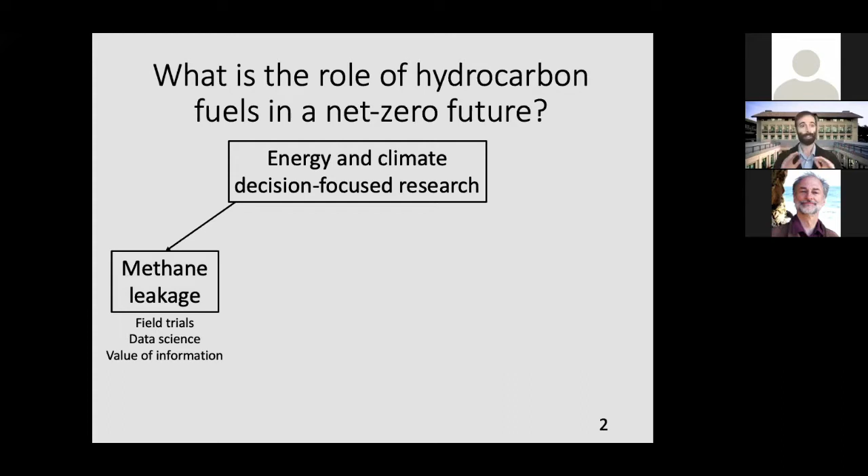So a bit more broadly about who I am as a researcher. My research focuses on the role of hydrocarbon fuels in a net zero emission future. So this is, broadly speaking, energy and climate decision focused research, and sort of four major areas, one of which I'll talk about in detail today. I'll give some tastes of the others. Methane leakage, methane emissions from the natural gas value chain is a major area I'm working on right now, particularly remote sensing, airplane and satellite-based methods for finding methane emissions. I'll talk a bit about that at the end. Energy systems modeling, which is what I'll be talking about today. Machine learning and energy consumption behavior analysis.

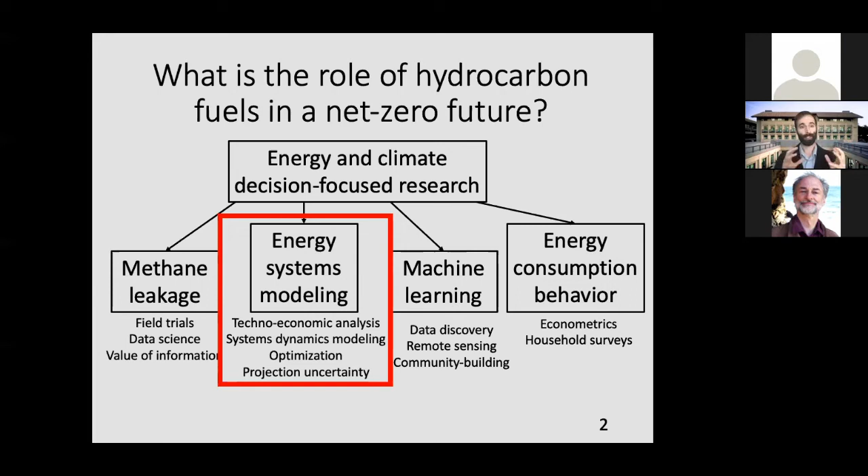So today I'll be focusing again on energy systems modeling, particularly what's called techno-economic analysis, trying to figure out how much something that we can't build yet, or haven't built yet, is likely to cost, and systems dynamics modeling and optimization, so modeling a system in motion.

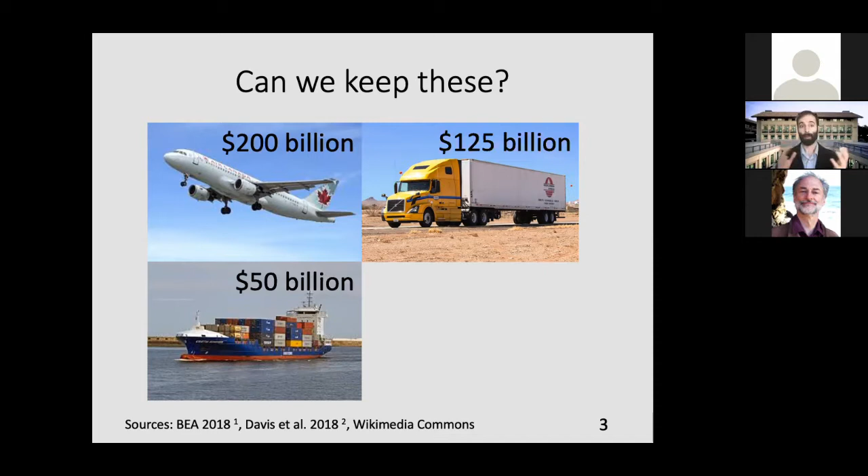And the big motivating question behind this research is, can we keep our $200 billion worth of airplanes or $125 billion worth of heavy trucks or $50 billion worth of ocean ships, and this is just those registered in the United States, a significant amount of capital that we have. It would be great if we could keep using it in a net zero emission future, especially given that globally, this represents about 6% of fossil fuel and industry-related carbon dioxide emissions.

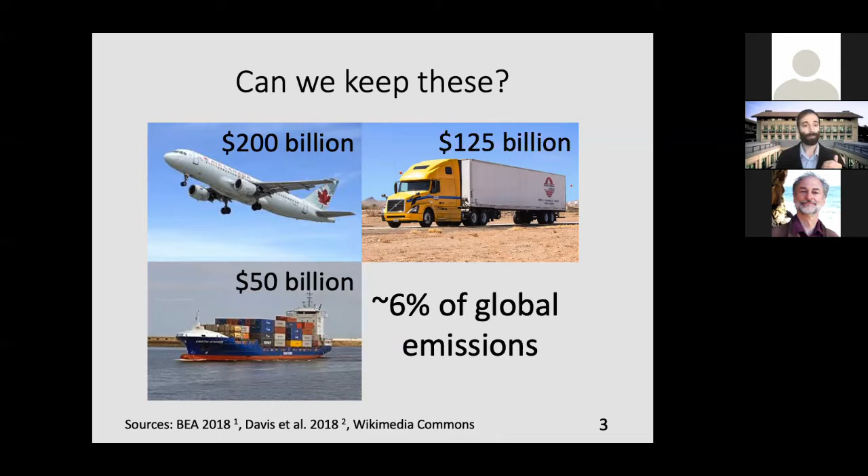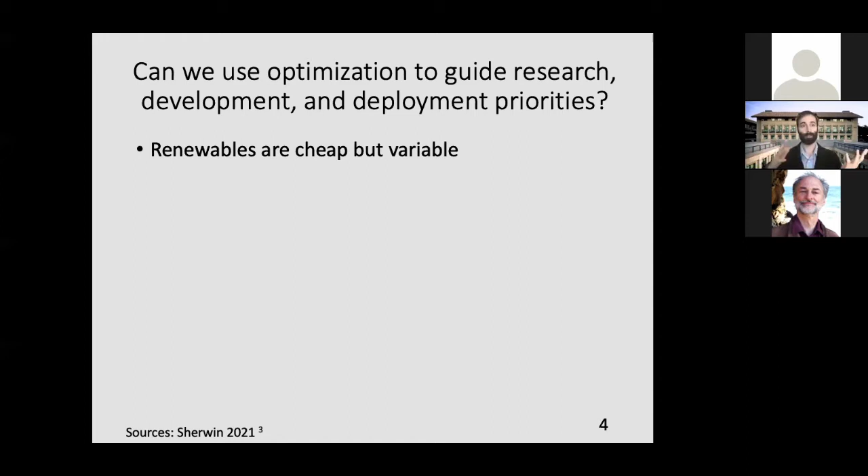So in addition to this broad question, I've also got a sort of more researchy question of, can we use, or how can we use, optimization to guide research, development and deployment priorities for emerging technologies? And a bit more detail on this: renewable electricity is getting super cheap, but it's variable. The sun is available some of the time, same with the wind. And that's going to make it difficult to use renewable electricity to power capital-intensive processes where you have to build a bunch of stuff that's expensive to build, and you kind of want to use it a lot of the time if you can.

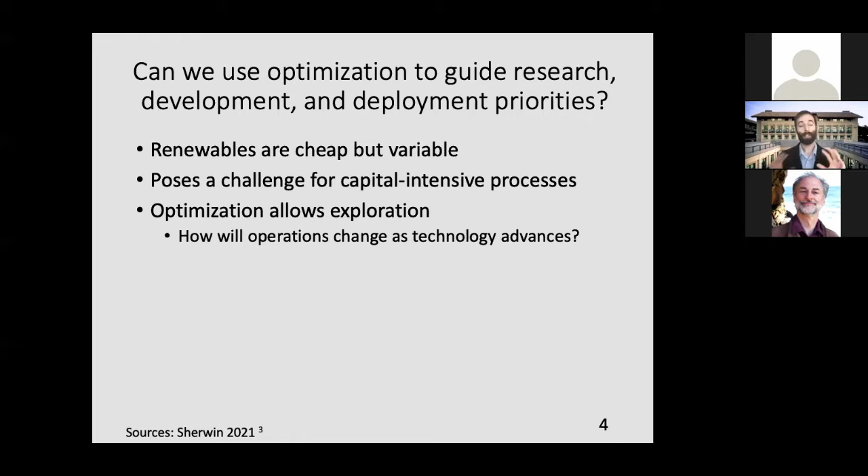And optimization lets us explore these trade-offs of designing and operating large or capital-intensive systems that are designed to use renewable electricity as efficiently as possible to produce chemicals or something else along those lines, and really understand how the dynamics of that system change as the technology advances.

And this helps us identify what might be non-obvious priorities for research, development, and deployment. Where do we invest in a given component? Do we want to make this component a little cheaper or more efficient or able to turn on and off faster? These are things that we can evaluate using this type of model and guide where we put our money to improve a given suite of technologies.

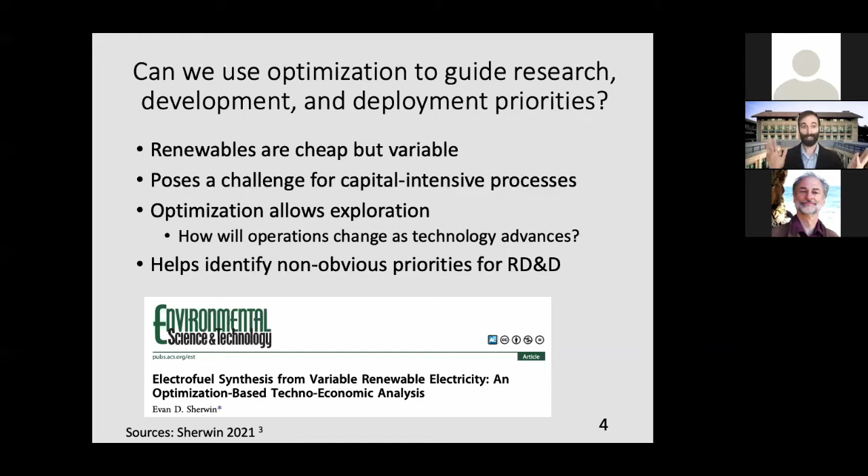So there's a real push, as Max alluded to, in the attempts to decarbonize the energy system, to electrify pretty much everything we can. It makes a lot of sense. Renewable electricity is super cheap, and it's basically zero carbon. So if we can just build a lot of renewable electricity and make everything run on electricity, then we've kind of solved the problem. And some of the economic motivations for this: natural gas electricity is somewhere in the ballpark of $50 per megawatt hour of electricity produced.

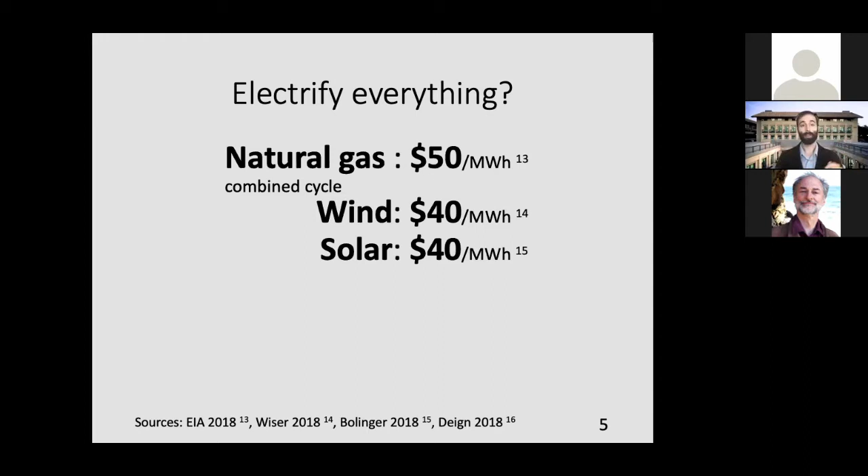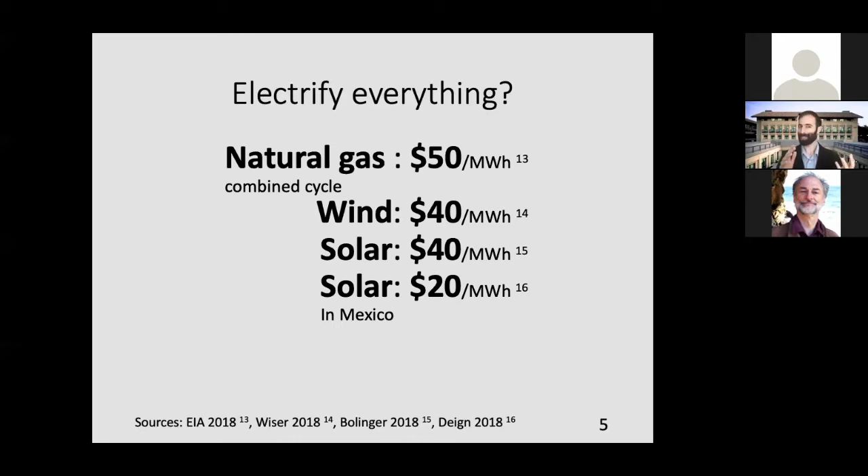And wind and solar at the best locations, at least as of a couple of years ago, about $40 a megawatt hour. So in terms of bulk energy, if it's okay that the energy comes at whatever time it comes, wind and solar in the best locations are already the cheapest form of electricity that there is. And in some places, it's way cheaper. In Mexico, even a few years ago, we were seeing power purchasing agreements coming in around $20 a megawatt hour. So that's half these United States numbers. And we're hearing numbers closing in on $10 a megawatt hour in places like Saudi Arabia. And even if that's underbidding somewhat, that's still an indication that these costs are really coming down.

So wouldn't it be great if we could run airplanes on electricity? Batteries are not there, probably never going to get there for long distance flights, but with electrofuels, with carbon neutral hydrocarbons, we can do that. And how can we do that? I'm going to start with the cartoon and then go into a little more detail in a minute.

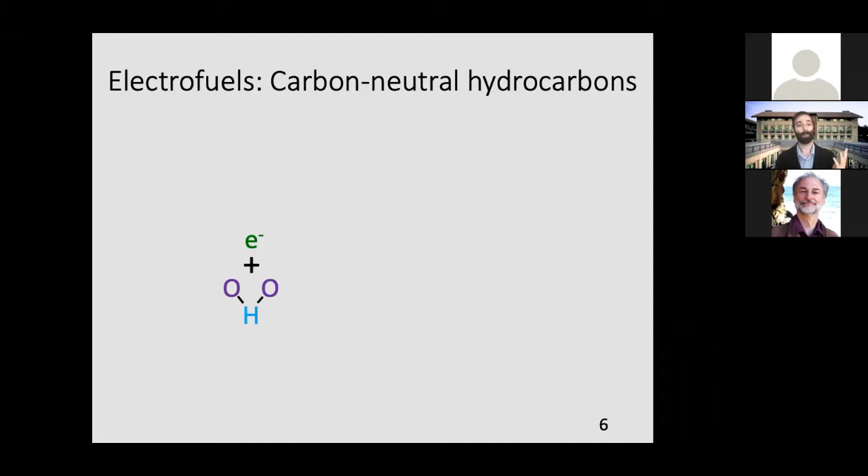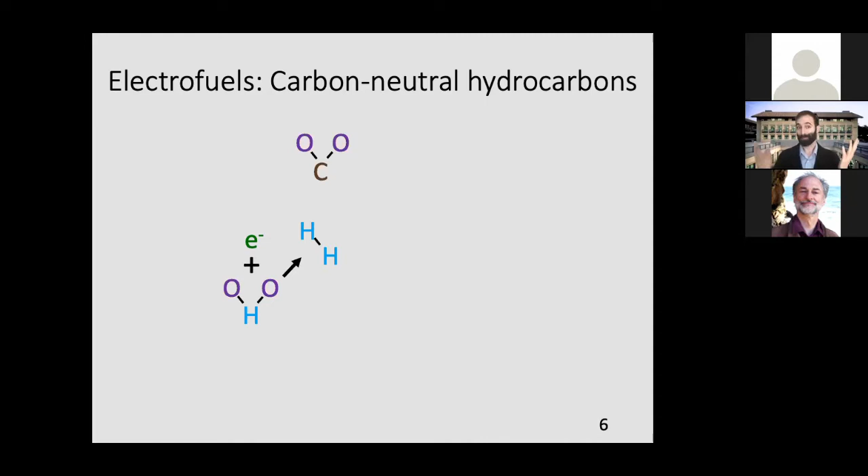Electrofuels start with electricity, and you mix that electricity together with water and do electrolysis of water, which splits it into hydrogen and oxygen, which I didn't picture here. Then you take that hydrogen and you mix it together with carbon dioxide that you've somehow taken out of the atmosphere. I'll get to how one might do that in a minute. Well, then you've got carbon, you've got hydrogen, so you can make hydrocarbons.

That's the basic idea. Of course, there are a lot of steps in between there, but with a hydrocarbon like this, once you burn it, yes, it emits carbon dioxide, but that carbon dioxide is just going back into the atmosphere where it came from in the first place. So assuming the process of making electrofuels doesn't emit emissions, it's net zero.

In this analysis, I'm focusing on jet fuel. And the main reason for that is, one, aviation is a super difficult application to decarbonize other ways. There's talk about hydrogen airplanes, or for short haul flights, electrification could work, but given how long it takes to approve new airplane designs and the state of the technology at present, we're probably not going to see hydrogen airplanes coming online in a big way for a couple decades at soonest.

So if we want to keep using airplanes and want to get to net zero emissions, we basically need a net zero emission liquid fuel. And the good news is that electrofuels are already approved for commercial blending, up to 50% into commercial flights. And that number could go higher if we add some additives. So this is something we could do today. This is not a far-fetched technology.

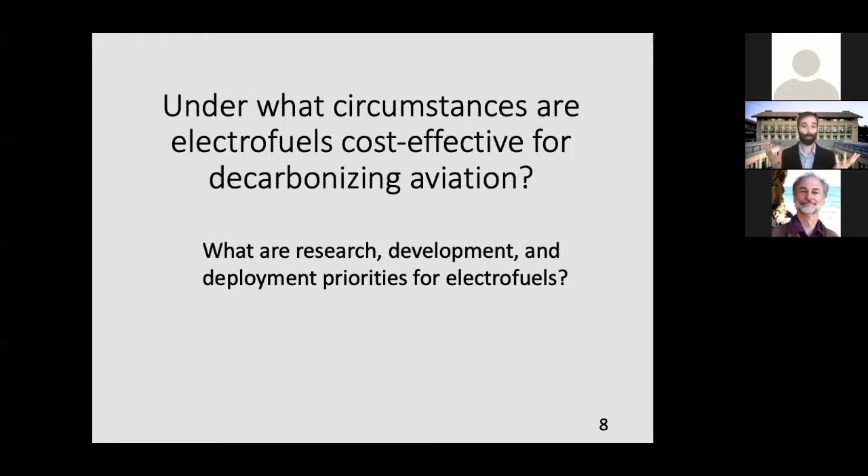So the more precise question that this talk's focusing on is, under what circumstances are electrofuels cost effective for decarbonizing aviation? Under what circumstances is this something we would want to do? And secondary question is, what should our research, development, and deployment priorities be if we want to get there?

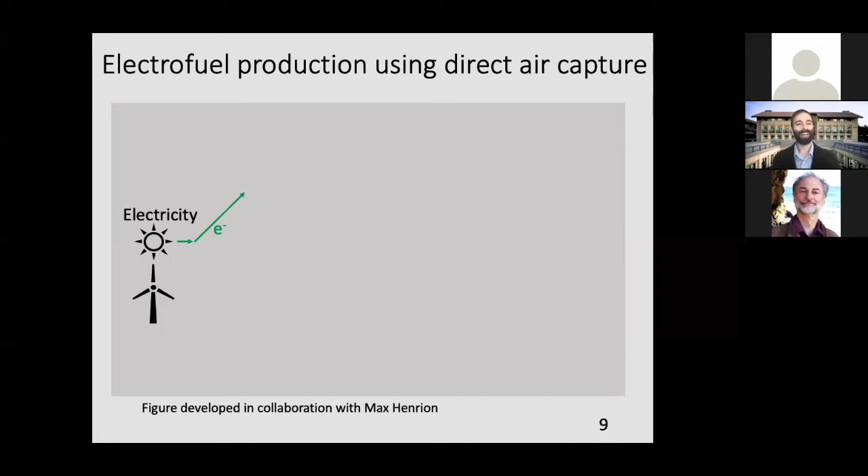All right, so getting into a bit more detail, the system that I'm looking at here is producing electrofuels using direct air capture as the carbon dioxide source. So I'll walk through the process. You start with electricity from the sun, from the wind, and I should note that Max helped design this figure. And that electricity is used for a few things, one of which is to power a direct air carbon dioxide capture system. And direct air capture, there are a few different designs, but fundamentally they're all basically a big cooling tower on its side, usually, that is blowing a bunch of air across some large amount of surface area, usually with a fan or something like that.

And on that surface area, there is what's called a sorbent. And that sorbent, it's some kind of chemical, binds to carbon dioxide in the air. And then that sorbent is regenerated by, you basically throw a bunch of heat at the sorbent, and it releases the carbon dioxide and regenerates the chemical, which you can then recycle. And so you get this pure stream of carbon dioxide coming out on one end. And by putting in a bunch of energy, you are able to continue the process.

And the heat requirements here, so there are two basic types of direct air capture, at least two basic types that are commercially available or under advanced stages of development. There is a relatively low temperature system, such as that produced by a company called Climeworks. That requires about 100 degrees Celsius heat, so about boiling, in order to regenerate the sorbent it uses.

And then there's a higher temperature system, such as that produced by Carbon Engineering, which requires heat at about 900 degrees Celsius, so significantly hotter. That also requires a bigger facility, but there could be some real advantages to that approach as well. For the heat source, if we want to run this all on electricity, one heat source could be an electric kiln.

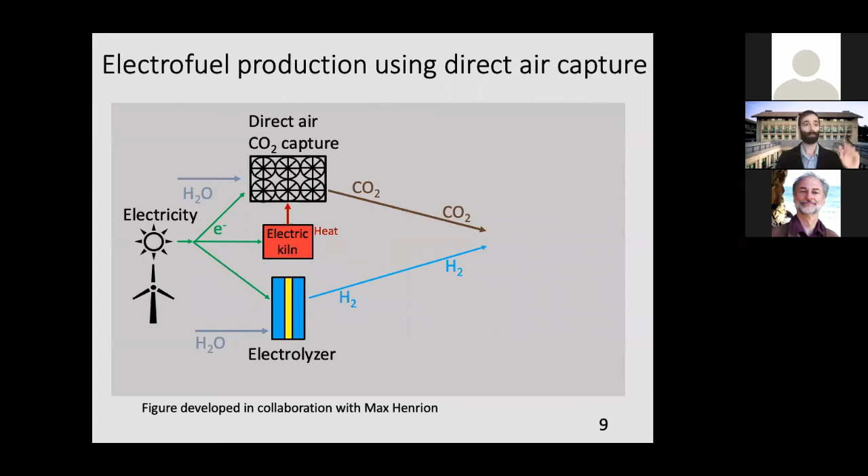So then we've got our electrolyzer, also powered by electricity. And that's going to take in some water as well and produce hydrogen and oxygen, which I didn't include on the graph, but is important for other parts of the system that I won't get into today. And then you run it through a fuel synthesis system. And the fuel synthesis, I'm assuming, is what's called the Fischer-Tropsch process, preceded by what's called the reverse water gas shift process. So reverse water gas shift takes carbon dioxide and hydrogen, mixes them together, and produces carbon monoxide and hydrogen. Once you've got carbon monoxide and hydrogen, you can then run that through.

So this Fischer-Tropsch process was developed in, I think, the 20s to take a gasified anything. It could be gasified coal or biomass and turn it into liquid fuel. So you can get your carbon monoxide and hydrogen from anywhere. Once you've got that, you can make liquid fuel with basically the same rough product distribution as refining oil. So potentially as high as I've seen up to 60% jet fuel, and then some diesel, potentially some gasoline or precursors to gasoline, which are not that difficult to upgrade. So we could get a decent amount of jet fuel out of this approach, and there would of course be markets for the other products as well, which would also be net zero emissions.

So the result's hydrocarbon fuel. And to give a sense of the energy requirements here, if we want to produce a barrel of oil equivalent of electrofuel, that's about 1,600 kilowatt hours. The direct air capture would require about 600 to 1,100 kilowatt hours of heat, somewhere between 35 and 340 kilowatt hours of electricity. And the high temperature system would take about 2.3 tons of water. The low temperature system actually produces half a ton.

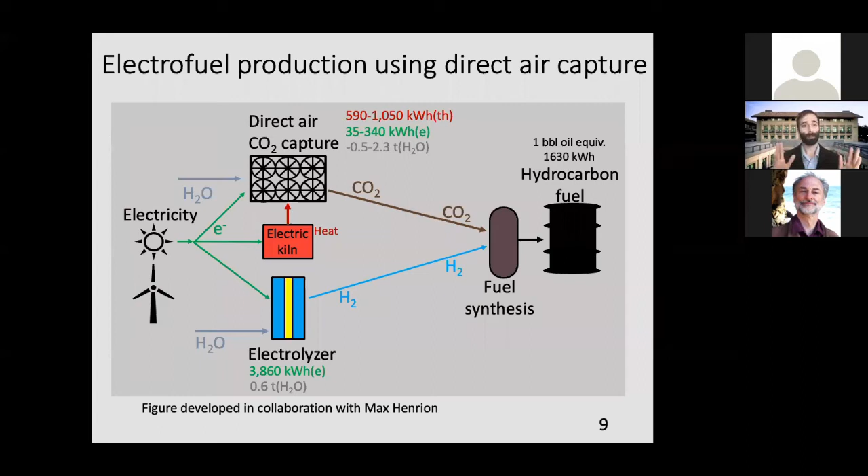But for those watching, many probably can see here, well, wait a second, this is using some pretty capital intensive equipment. We've got to build this whole big direct air capture system, the fuel synthesis, to a lesser extent, the electrolyzer. We probably want to operate these pieces of equipment more often than just when the sun's shining, when the wind is blowing.

So it'd be nice to have storage of electricity, lithium-ion batteries, heat storage, which could be molten salts or supercritical carbon dioxide, or even phase change materials, which can get essentially to the heat requirements for high temperature direct air capture, and hydrogen storage, either a big tank or if you're close to a salt cavern, something like that. Carbon dioxide storage, pressurized in a tank. You might even want to build a fuel storage system, just a big tank like a gas tank, and build a smaller pipeline, something like that. So those are some forms of flexibility that the system can use to help run, say, the direct air capture more of the time than the sun is available, or the wind.

But wait a second, if we're already in a world where we're pulling carbon dioxide out of the air, then there's really no reason we can't supplement this system with a natural gas interconnection and offset the resulting carbon dioxide emissions from the natural gas by paying somebody else at a different facility to capture the equivalent amount of carbon dioxide out of the air and put it in the ground, sequester it. So it's still net zero as long as that takes place. And this could provide some really important flexibility to the system that reduces overall costs while remaining net zero. And the same is true for grid electricity, which for a while is going to have some emissions associated with it.

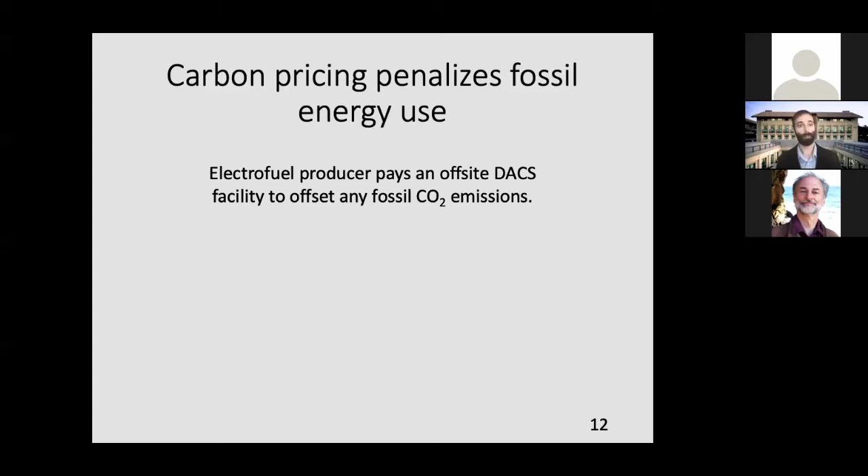And I should note that the natural gas I'm assuming is oxygen fired in the direct air capture system. So it's actually co-captured with the rest of the waste stream and then can be put into the electrofuel. And since it's offset by direct air capture at another facility, again, still net zero. And the cost of offsite direct air capture is just commensurate with whatever the scenario assumes the cost of direct air capture is.

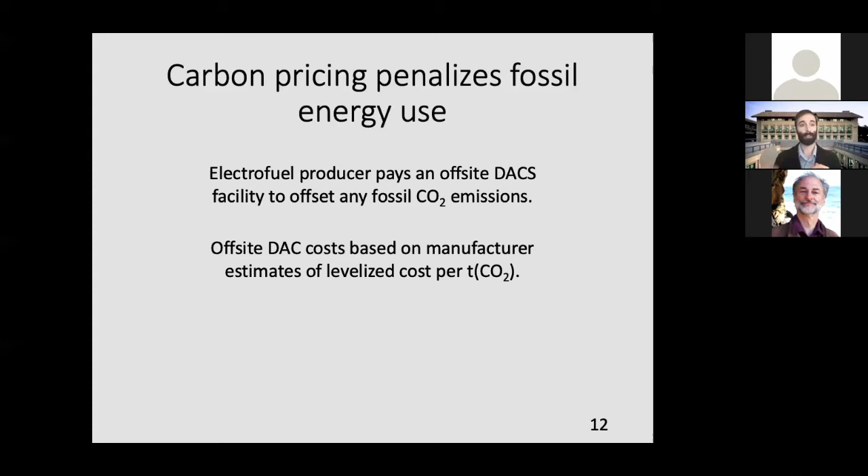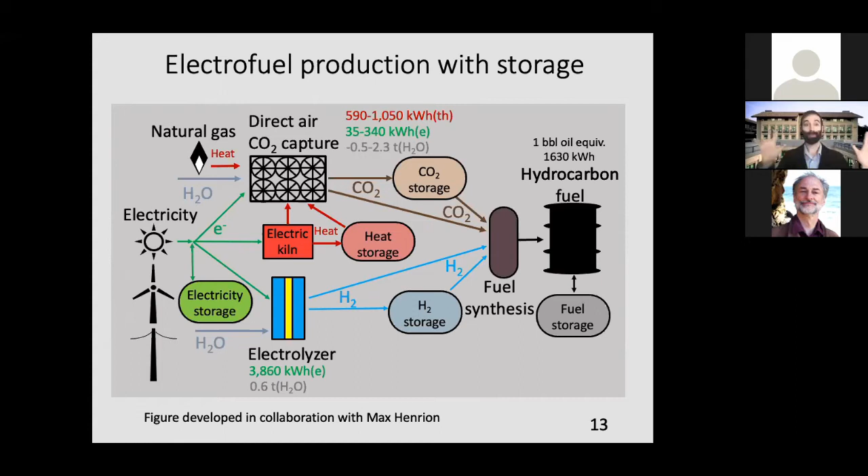So for those in the energy modeling world, looking at this problem, we've got variable renewable electricity. We've got all these capital intensive assets. We have to decide how much of each one to build. How do we operate them throughout an entire year? This is an optimization problem. And that's exactly the way I structured it. So it's a linear optimization, nothing super fancy in terms of the model formulation.

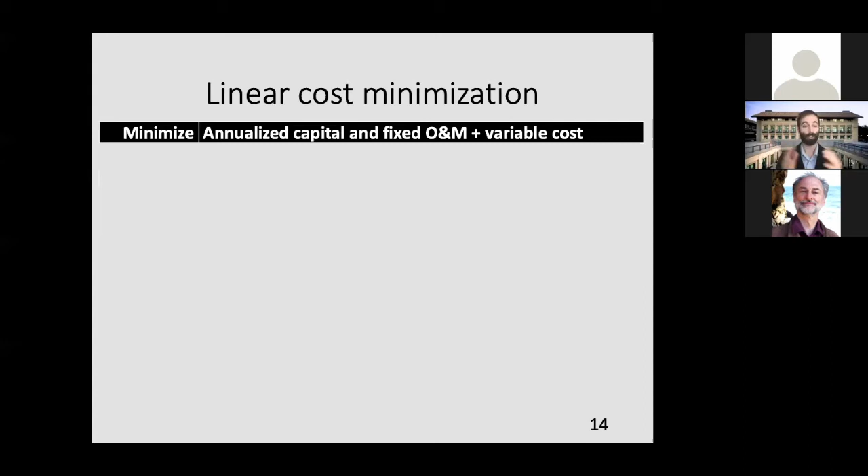And the reason I did that was to make sure that the model reached full economies of scale for all system components. And in this case, the direct air capture system is the main one that I wanted to make sure was being built large enough. So this is pretty big by renewable electricity installation standards if we're building a big solar array or wind farm to power this, but it's tiny by oil refinery standards. And that's a reminder of how energy dense hydrocarbon fuels are.

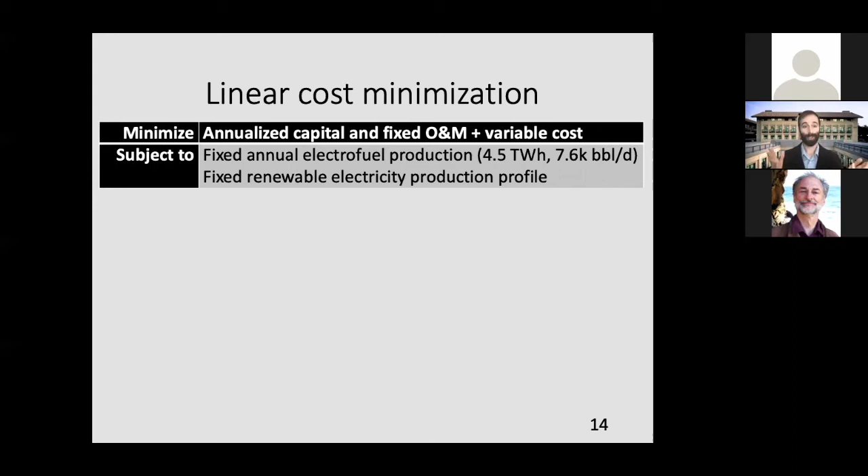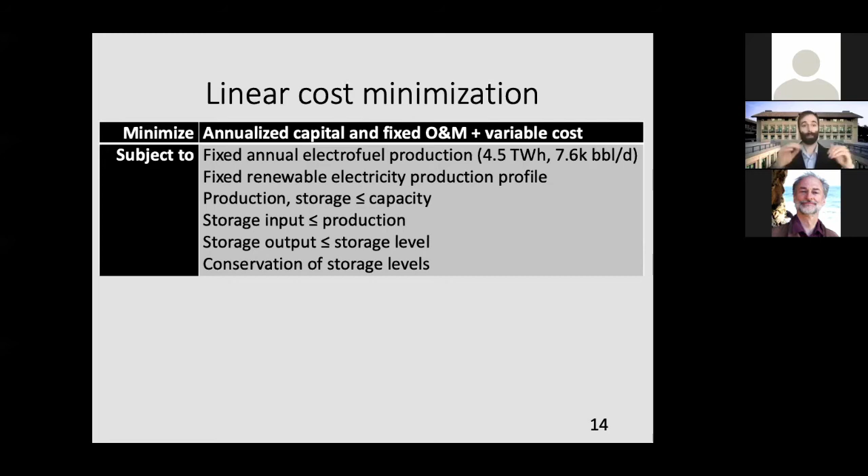So some other constraints: the renewable electricity production, when the sun's available, when the wind's available, the model can't vary that, that's fixed. Makes sense. The production and storage in a given component: we can't have a production level that's higher than the capacity that's been built for the component. Same with storage. These are all kind of common sense constraints.

And the real heart of the model is conservation of energy and matter, because things like electricity or hydrogen could go in a few different places at a given point in time. And the model keeps track, does the accounting of where everything's going, accounting for losses and stuff like that, using conservation of energy and matter. And then there are also constraints on how quickly some of the components can turn on and off, ramping constraints. And I built this model in the Analytica optimizer with the Gurobi solver.

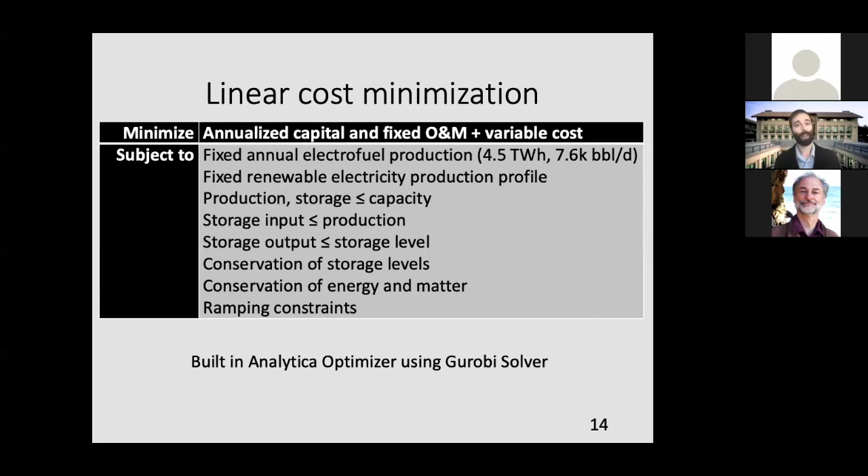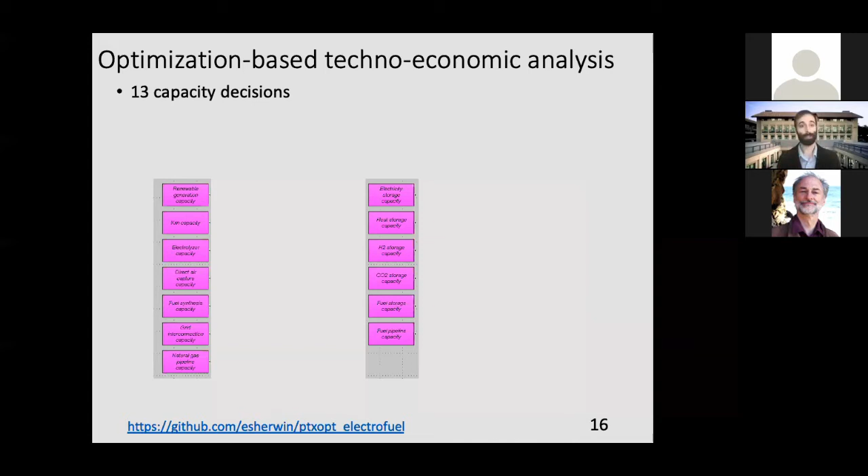And then on the right-hand side, we've got the capacity for all the different types of storage, as well as the fuel pipeline that ships all the fuel out to market. And so those are 13 capacity decisions. But then we've also got, if we do 4-hour resolution, which is what I did for this paper, over 1 year, that's almost 66,000 operational decisions.

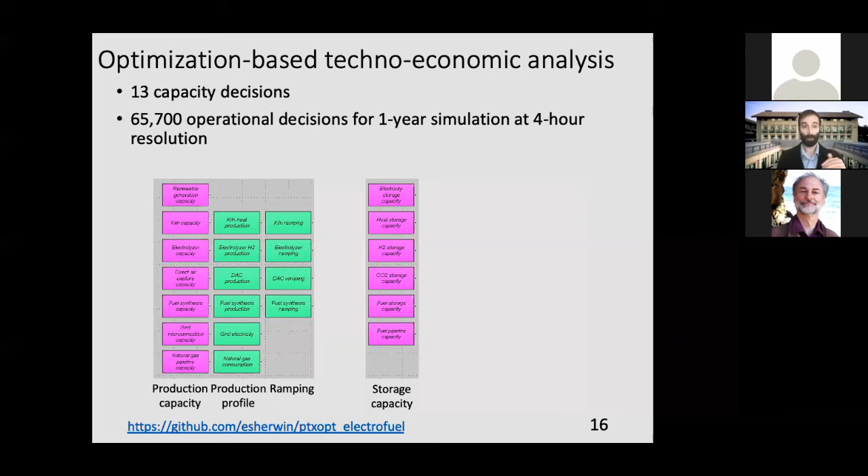So we've got the production profile: at what level of production is each of these components over time? And of course, the renewable electricity, that's fixed. Ramping: how rapidly are these components turning on and off? There's some constraints there. There's some energy consumption associated with some of those components turning on and off or ramping up and down. And waste, so curtailment, particularly for renewable electricity. At some times, it might not be economical to build all the capacity so big that it can use all the electricity that's available at the peak hour of the day.

It makes sense at times to discard some of the excess energy, mostly in terms of electricity, some heat. It doesn't really throw away anything else. And then for storage, we've got, of course, our inputs, our levels, and our outputs for each of those components in each time step.

And this model is freely available online. I call it the Power to X optimization tool, PTX-opt. And I'll show the full optimization formulation in a second. This link's available in the paper. I can stick it in the chat if that would be useful.

And I'd like to take a minute at this point to talk a bit. This is an Analytica webinar. I used Analytica for this model, and I'd like to talk a bit about what I see as some of the real advantages of Analytica for this type of modeling. I began this modeling effort with not that much time left in my PhD. Time was of the essence, and if I thought it would be faster and more effective for me to write up this code in Python or R or MATLAB or some other language, all of which I know and use for different things, I would have done it. But I chose Analytica. And there are a couple of real advantages here.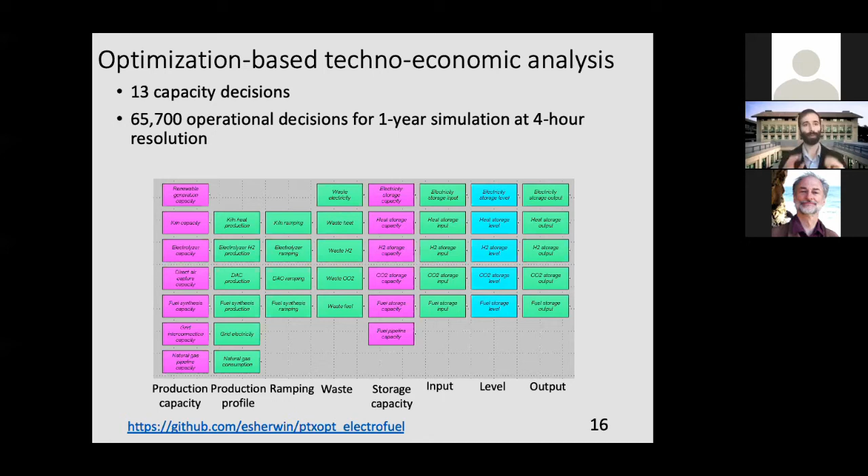And the notation is also very compact, so instead of having a giant for loop or, hopefully not too many of these, a big array of spreadsheet cells, and then another one with an operation done on all those, it's very compact notation. But again, I think the biggest thing here was for rapid agile model development, the ability to make large structural changes to the model at basically any point in the development process.

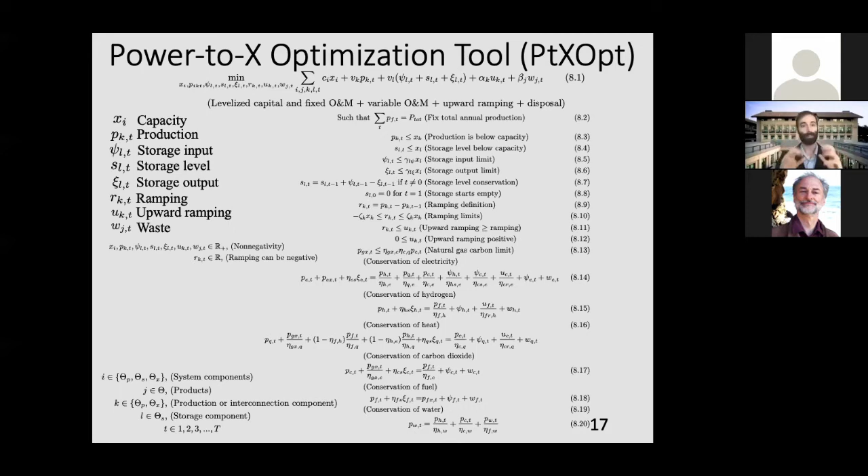So again, I call this model the Power to X optimization tool, PTX-opt. And I'm not going to go into detail of exactly everything I'm about to show, but this is the full optimization formulation of the entire model. And the main thing I want to point out here is that this whole thing fits on one page. It's not that complicated a model. Of course, it's more complicated than a super simple model, but it's got a simplicity to it.

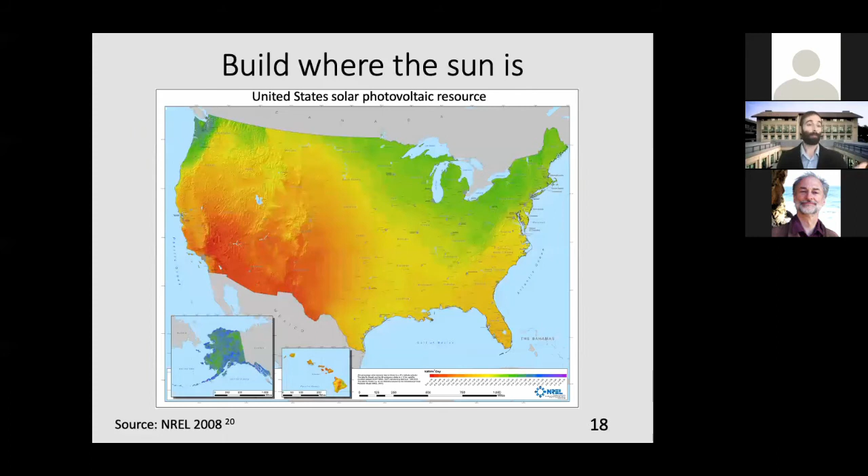Now, one of the hardest or most time-consuming parts of this process was figuring out all the parameters that I wanted to put in the model. And one of the most important ones is, where do we build this system? Where are we assuming that it's coming from? If we can build a system kind of wherever we want, we're not really geographically limited. Why not build where the best sun is?

So in the United States, that's somewhere like Tucson, Arizona, 29% capacity factor. And that means that a solar installation there with one-axis tracking would produce 29% over a year as much electricity as if the sun was just overhead at high noon for an entire year. So as solar goes, that's about as good as it gets. And I'm using data for the entire year from the National Renewable Energy Laboratory's System Advisor Model.

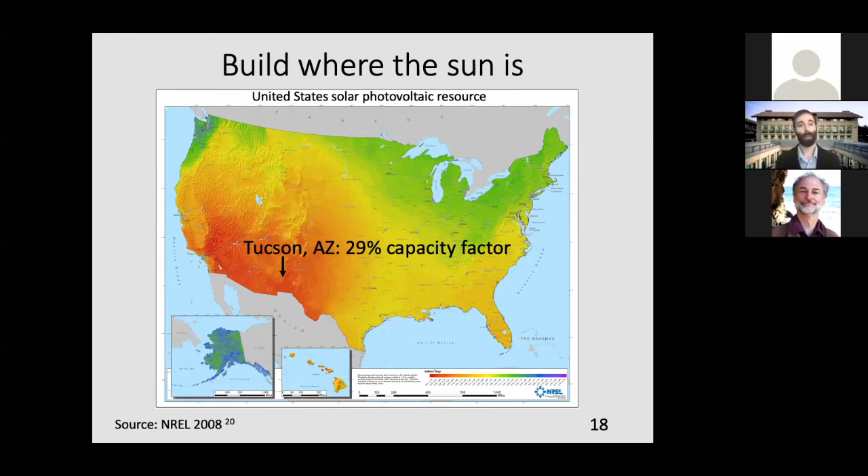And for wind, I did the same. This one's probably a little less scalable, but the best wind resources in the US are somewhere like southern Wyoming, which has a 58% capacity factor. So the wind is blowing flat out an awful lot of the year.

And the result of picking these really good locations for wind and solar electricity is low electricity costs. I use three main cases: today, next decade, and by 2050. The today case is based on the peer-reviewed literature and government reports, so it's necessarily somewhat conservative because there's a couple-year lag. But today I'm looking at about $40 per megawatt hour of electricity.

In the next decade case, falling to $20 to $30 per megawatt hour, depending on the technology, and into the teens by 2050. And I'm happy to talk in more detail about how I got each of these numbers. There's a lot to go into that I won't be able to in the span of just one talk, but it's all in the paper.

And for direct air capture, this is the other sort of major parameter, which doubles as the carbon price. For high temperature and low temperature systems, well, today only low temperature systems are, at least as of when I wrote this, commercially available. There is a high temperature system under construction at scale right now. We don't know what exactly the costs are coming in at, but it's a promising development.

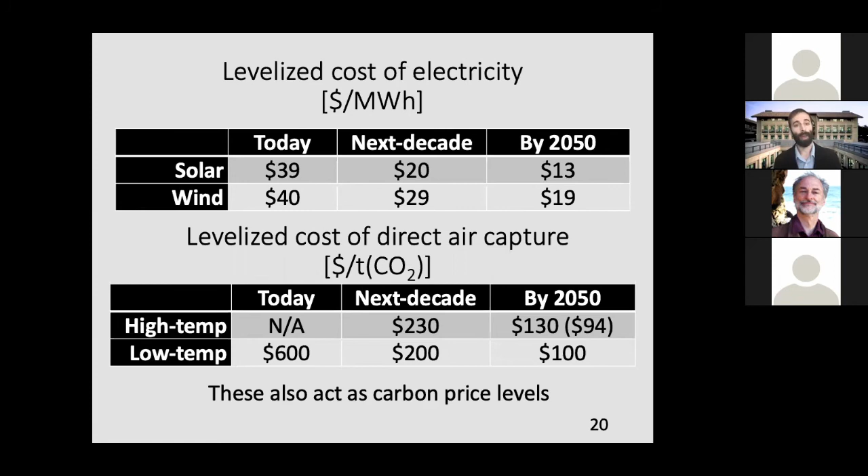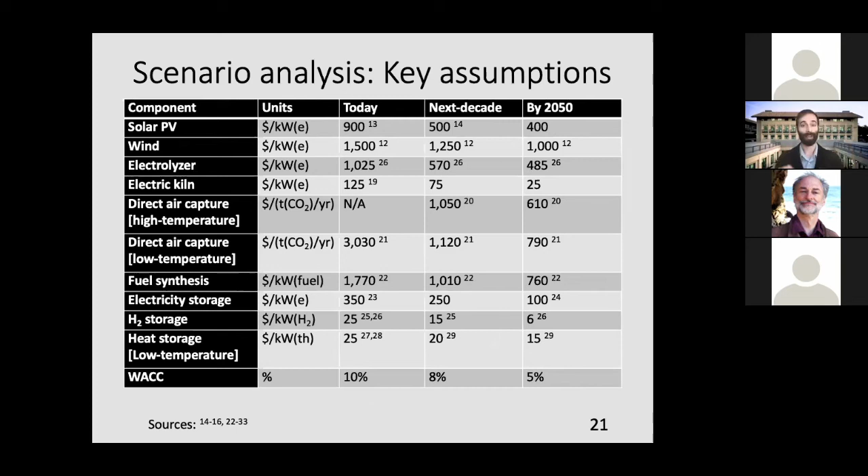And here are some of the key assumptions in terms of the capital cost of each individual component. I'm not going to go into detail on each one, but if anybody sees a number and wants to ask about it in the Q&A, I thought I'd at least flash this up. And of course, we can go back to this in the Q&A, and everything's in the paper.

And I'm about to show some stacked bar charts that show how the different components contribute to the total cost of electrofuels. Oops, I went backwards. If we were to build solar electrofuels today, using the assumptions I put together, we're talking about more than $4.50 per liter of gasoline equivalent. Multiply that by about 4 to get dollars per gallon. So this would be pretty expensive. But again, very early stage, costs generally come down quite a lot as development moves forward, deployment moves forward.

And the big cost contributors are renewable electricity generation, so this is the solar panels in this case, the capital and the operations and maintenance costs there, the electrolyzer, and the direct air capture system. And that fourth big black bar at the top, remember those net zero natural gas and grid electricity interconnections, that is, the model decides in this today case that it's so expensive to produce direct air capture in particular, but electrofuels in general, that it actually makes sense to use a fair amount of natural gas and grid electricity to keep the whole system, or as much of it as possible, running at a very high level of utilization, even though that means paying $600 a ton to offset that resulting carbon dioxide.

That starts to change if we get to this next decade case, where costs fall quite substantially to about $1.70 or so per liter of gasoline equivalent. The biggest components are pretty much the same. But this is now in the range of a lot of biofuels, especially biofuels that are compatible with jet fuel substitutes. And note that the cost for high temperature or low temperature direct air capture systems is basically the same for the two different electrofuel production systems, which is I think an interesting result, because one's more capital intensive, one's more energy intensive.

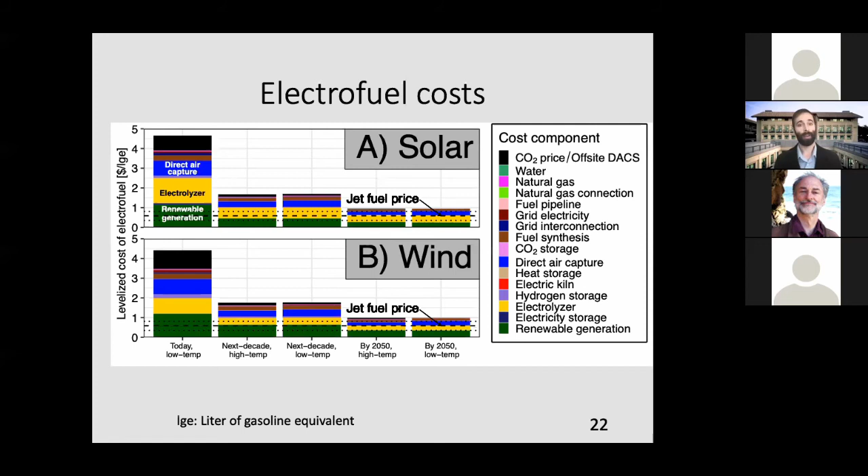So it looks like today we wouldn't want to do this on a super large scale, but at the same time, in the long run, there are very real prospects that this could be potentially our least cost option for getting to net zero while maintaining aviation and some of these other liquid fuel dependent applications. And this raises the question: if we're here today and we want to get to here, what should we focus on if we want to bring those costs down?

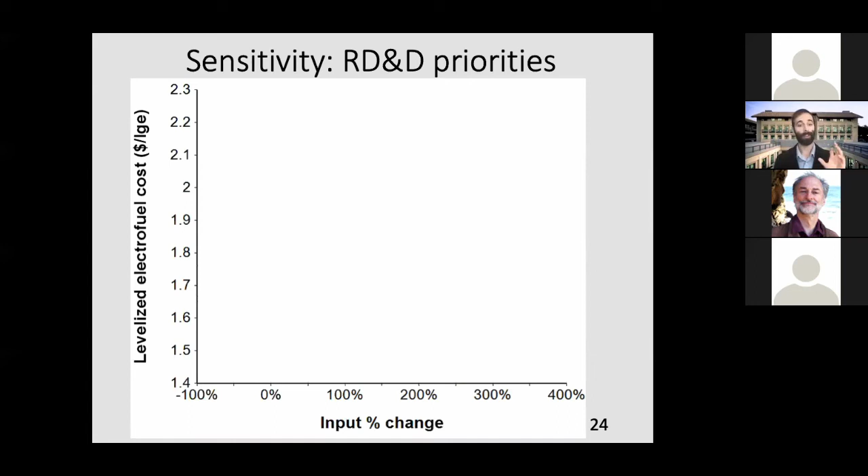So here we have a sensitivity analysis I'm about to show. On the y-axis is again the levelized cost of electrofuel, dollars per liter of gasoline equivalent. And note that the y-axis does not go down to zero. And on the x-axis, we've got the percent change in inputs. So we're starting from the solar next decade high temperature case, so again, a next decade case in that middle case.

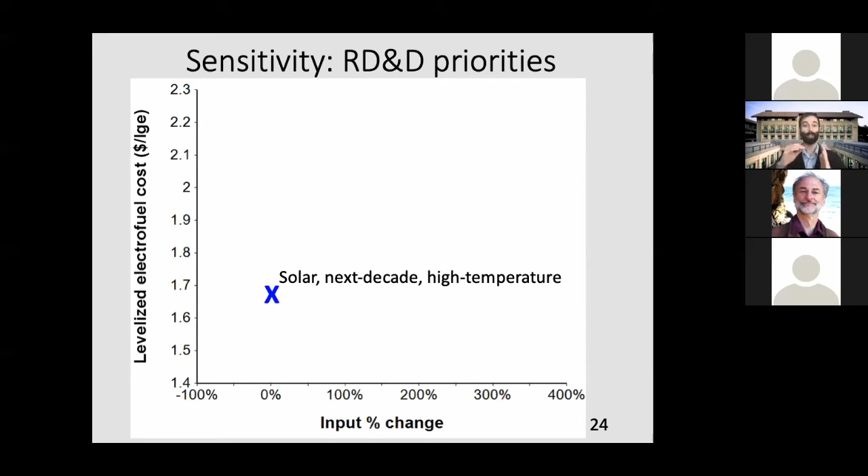And I vary each input from its today case, so the more conservative value, to its by 2050 case, the more optimistic value. And the result is some percent change in the inputs, which is what's reflected on the x-axis, and that translates to a change in the levelized cost on the y-axis. So let's start with direct air capture.

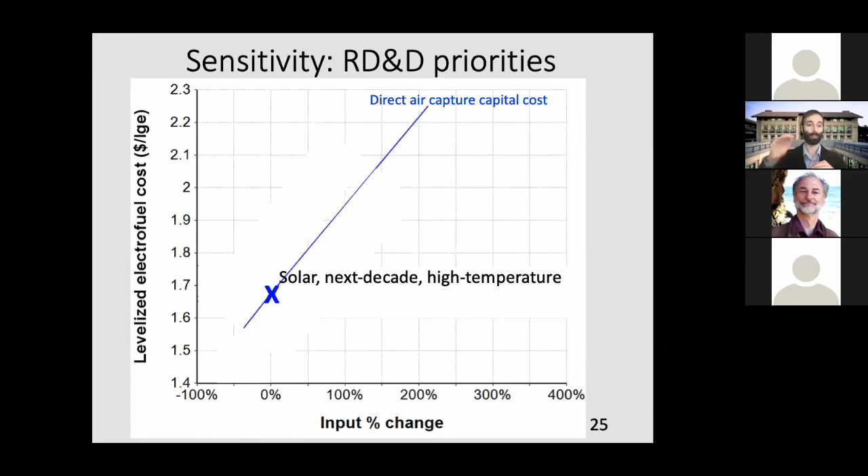Which is the most sensitive parameter, the capital cost and fixed operations and maintenance costs of direct air capture, which introduces from bottom to top a swing of more than 60 cents per liter of gasoline equivalent. So that's a priority. That has to come down if we're going to get to lower costs for electrofuels. And then I'm going to show not all the other parameters, but everything else with a swing of more than 10 cents per liter of gasoline equivalent.

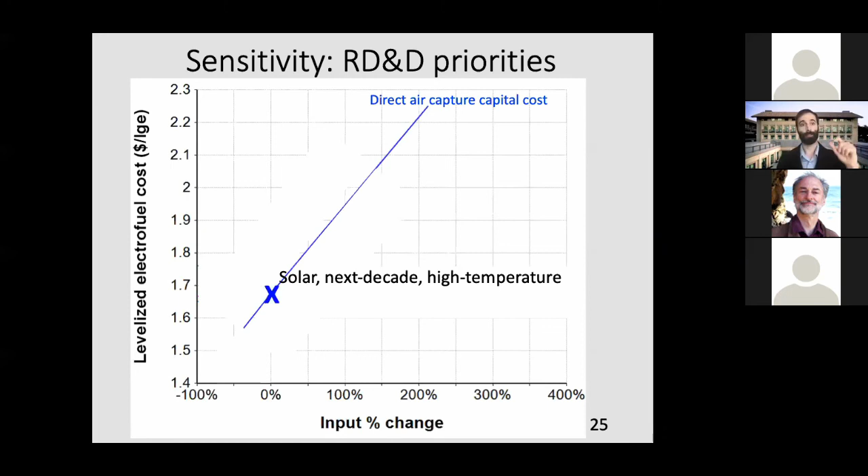And one thing really jumps out, which is that the top three most sensitive parameters are all the capital cost of those three big cost components, which makes a lot of sense. No surprises there. Fuel synthesis capital cost is there, but it's not as sensitive. And the weighted average cost of capital and lifetime of the equipment, those are just numbers that we use to convert capital cost into something that's comparable with, say, energy purchases, something that we use in a given year. So really the six most sensitive parameters here all relate to capital cost.

But following on that, we actually get to a somewhat different story. So reducing capital cost is key, no question about that. But flexibility is also important: these are the two most important parameters, fuel synthesis minimum production and the hourly ramping rate, how quickly it can turn on and off. Those are the two most important parameters after those first capital cost parameters.

And so the difference here is, in the today case, I'm assuming that the fuel synthesis system just has to operate flat out all the time, which is pretty much how a lot of large-scale chemical processes along these lines work today. But even the ability to just go to 50% production, from here to here, or related to that, the ability to ramp up and down by 5% per hour, so essentially the ability to turn the plant on and off in a day.

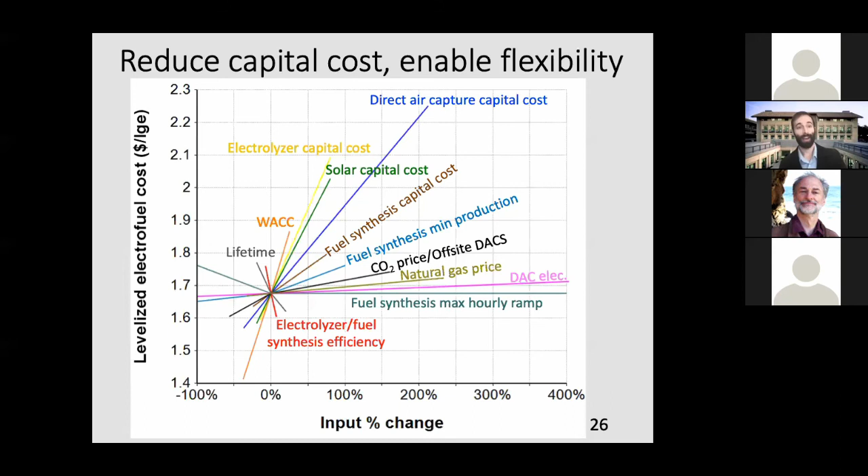And to illustrate some of that, and what I mean by flexibility, I'm showing here a chart of daily average utilization by component. So starting with the electricity, this is averaged over the day, because for solar otherwise it would just be sawtooth, we couldn't read it. It's an average of 29% utilization factor, capacity factor, but it's pretty steady over time. There's a little seasonality, but not a huge amount.

But if we were to run the entire system at that 29%, the cost would go up by about 70%. So we need some flexibility to be able to operate some components at a higher level of utilization. And this is the direct air capture. The direct air capture is operating at about 90% utilization. So the system is able to shift energy around and make use of these natural gas interconnections to make sure the direct air capture is continuing to run basically full out for essentially all the year.

The electrolyzer, it's kind of in the middle. It's more capital intensive than the renewable electricity, but it's not capital intensive enough that it makes sense to build a bunch of batteries or something like that to keep it running all day. So it's operating at like 45 or so % utilization, whereas the electricity is only about 30. And that's because it's undersized somewhat relative to the electricity.

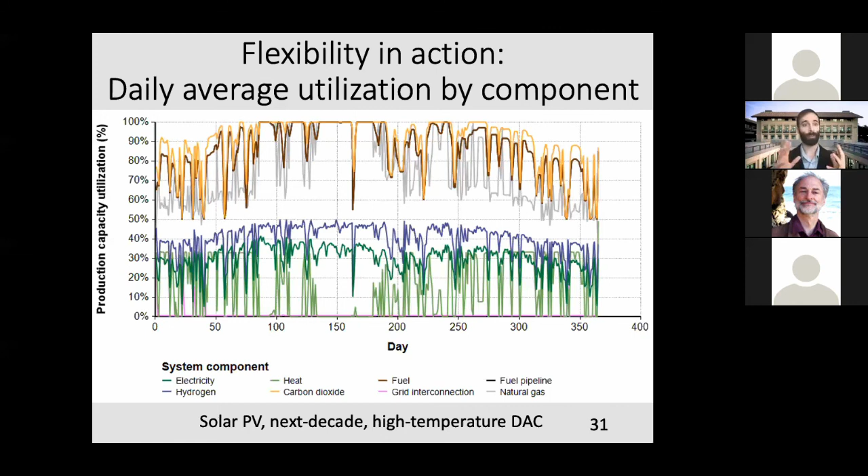So when I talk about flexibility, there are a lot of different types, and we can see that there's some sort of seasonality here. And there's a lot of discussion about seasonal storage in the decarbonization community. And I found some seasonal storage. This is in the next-decade case using solar electrofuels, solar electricity and high temperature direct air capture system.

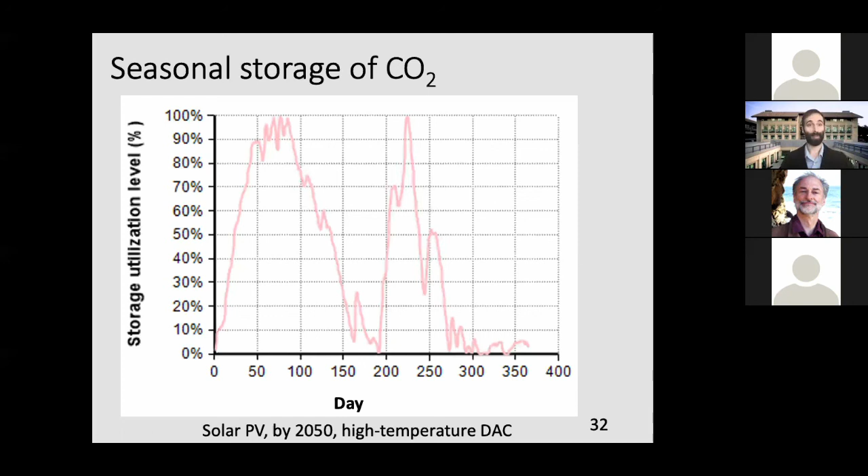And you can see that, whatever this product is, it's being stored for like 200 days. So the model is shifting something across seasons. And it turns out what it's shifting is carbon dioxide. So it turns out that if the cost of building carbon dioxide storage falls enough, it's about $10,000 today from what I could find. This was actually really difficult to get a good number for.

If it falls to about $1,000 per ton, for example, because most carbon dioxide storage is in very space constrained environments. If we're out in the desert, we don't care that much about space. We could probably bring the costs down quite a lot. We actually get seasonal energy storage through carbon dioxide. And this is something that I don't know if it was on anybody's radar, definitely not on mine before I built this model, but again, the model illustrated a potential, something we might want to look into,

super low cost storage of carbon dioxide, which I differentiate from sequestration. Sequestration is when you put something in the ground or somewhere and it never comes back. Storage you might want to use later. So this is an example, I would say, of this type of optimization modeling pointing us in a direction for a research and development priority potentially.

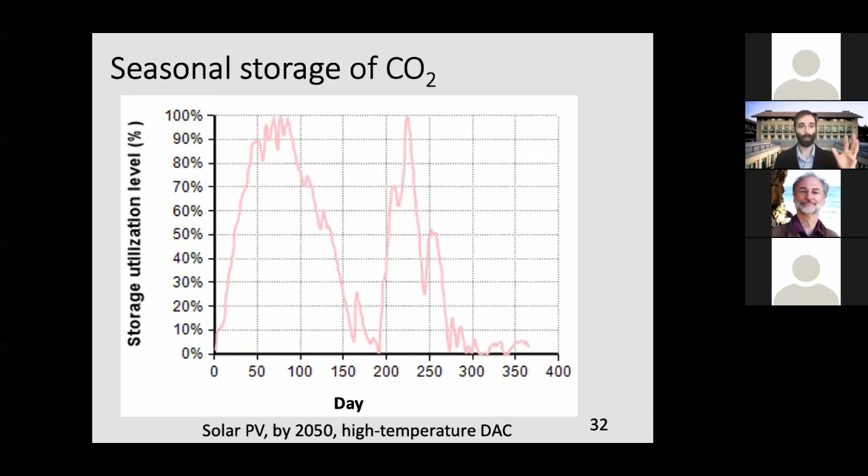And the last major point I wanted to touch on, again, relates to seasonality in the discussion of electrofuels. So what about the wind? Again, the solar was 29% capacity factor. The wind is operating 58%. It's double, but it's also much more jagged and seasonal. So what does the system do here? This again is averaged over the day for the full year. Wind electricity production is a fraction of installed capacity.

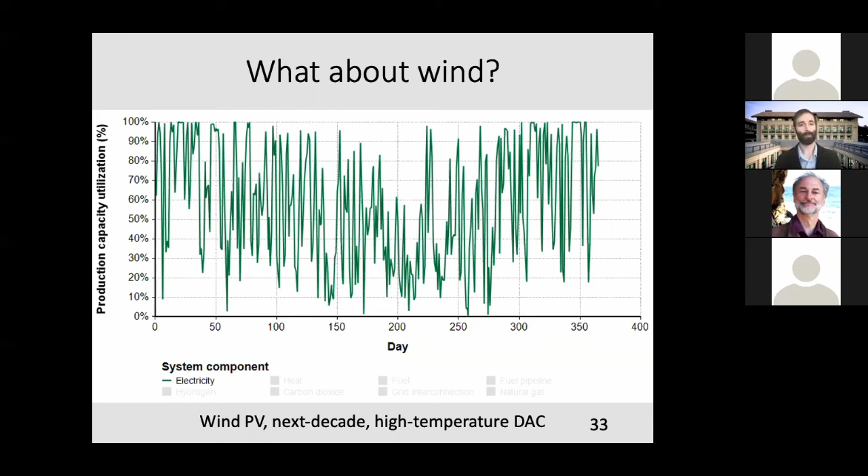It's not as clean a story at all. It's much more difficult to deal with the seasonality, to make the direct air capture keep running at a high level of utilization, the fuel synthesis as well. Those more capital intensive components, the daily variability from solar, super easy to account for that and keep things running at a high level of utilization. With wind, not so much.

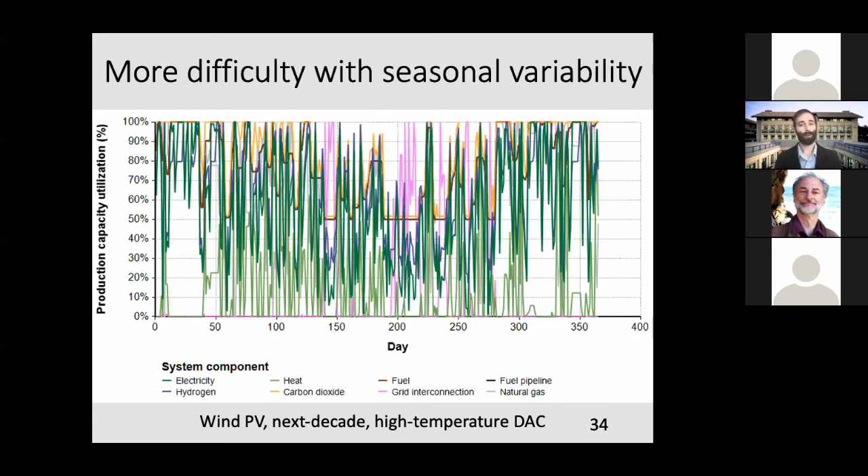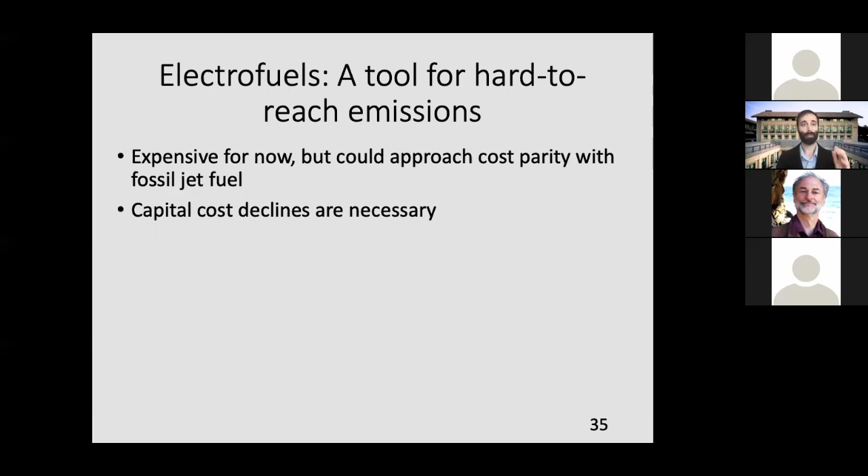So in conclusion, I view electrofuels as a tool for hard to reach emissions. This is an approach that would be expensive if we were to do it at a really large scale now, but it looks like it might get close to cost parity with jet fuel. Obviously, the future is very difficult to predict, specifically for energy systems, but it looks like there's a reasonable chance that this could happen. We'd have to bring the capital costs down quite a lot, especially for those three major components: the direct air capture, the electrolyzer, and the renewable electricity. Of course, there's a lot of money going into doing that anyway right now.

But we also need flexibility to get this to work. And there are a few different forms. Again, we could just have storage of electricity, hydrogen, heat, carbon dioxide, the ability to turn a given component on and off quickly, or reduce its minimum operating level, or have net zero natural gas or grid electricity interconnections that are offset by carbon dioxide removal. And finally, the ability to curtail excess renewable electricity in particular.

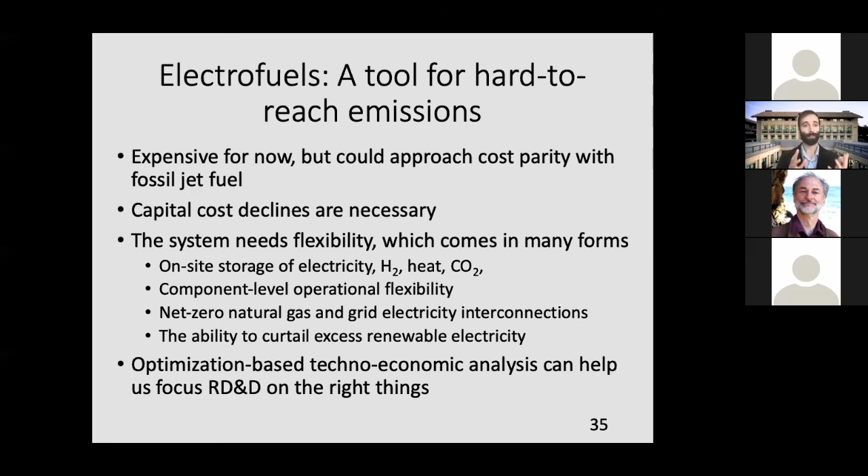And I really view this as both a hopeful analysis for electrofuels and also an indication of this type of tool, techno-economic optimization, as a really useful approach that we can use in a variety of other circumstances to gain insight into potential priorities for research, development, and deployment of emerging technologies.

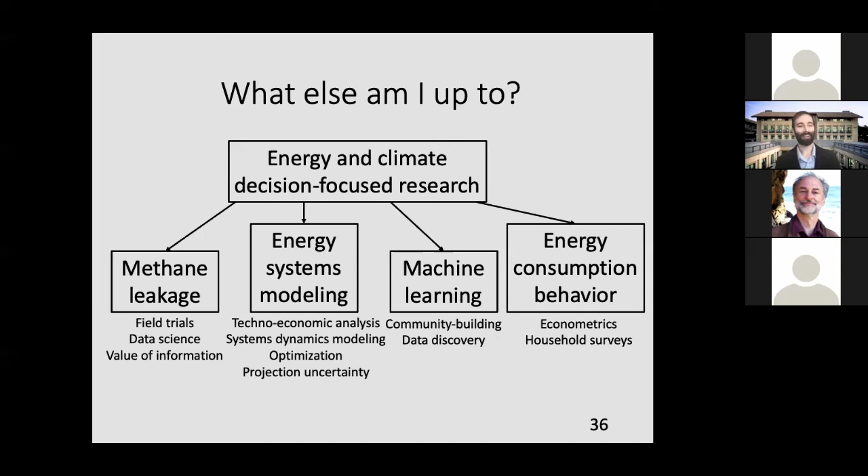So with that, I'm going to talk a little bit about some of the other things I'm up to, because I'm having a lot of fun. So in methane emissions, I am... Evan, I just want to make sure that you leave enough time for Q&A. Okay, how are we doing? We have a number of questions that people have come up with. Very good, would you rather deal with those first? Okay, so how are we doing on time? I can't see the... Got another 7 minutes. Oh, okay, let's go to Q&A.